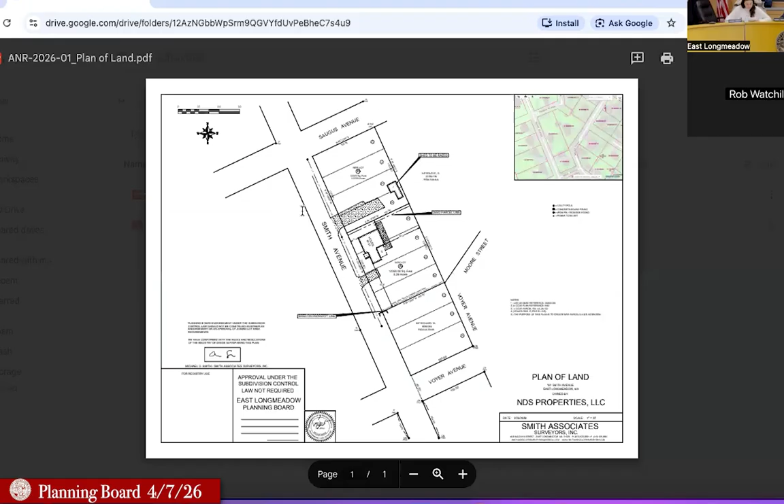Approval not required, ANR 2026-01, request to create 2 new parcels at 101 Smith Avenue, Assessor's parcel ID 4A2910-102, located in the Residency Zoning District, applicant Dawn Orbo, 69 Lenox Circle, East Longmeadow, Mass, 01028. Okay, anybody here for the petitioner?

No, Mr. Chair, but they asked me to speak on their behalf for them, if that's okay. Okay, so basically they're just taking an existing lot and splitting it into 3 separate lots along Smith Avenue.

So as you can see on the screen, I know it's a little hard, but you have one box here, a box in the middle, and a box up top. These 2 boxes on the ends each have a road that butts them. This one up here is Saugus Avenue, this one down here is a road called Voyer Avenue, and Smith is along the side here.

Just from my initial review, all of them meet the regulations for the zoning districts they're located in, in terms of frontage and lot size. I don't anticipate or see any issues splitting the 3 properties as they are.

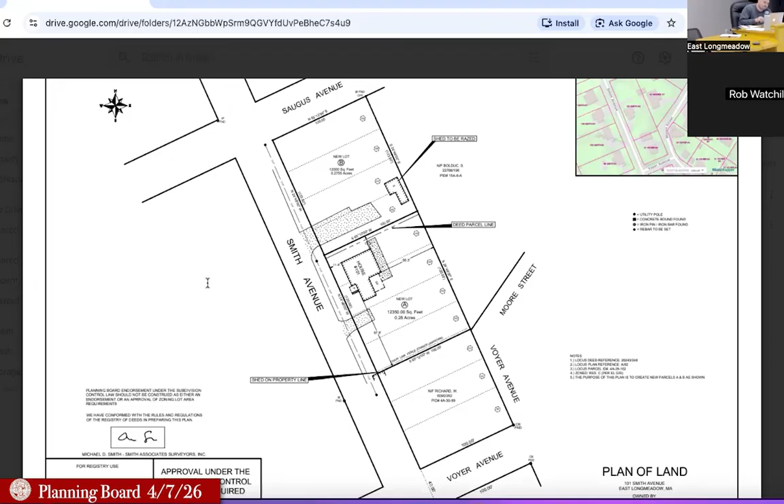Any questions, concerns? Do I have a motion to endorse the plan? So moved. Do I have a second? Second. Ooh, I was turning it off and I hit the emergency button. Okay, any discussion? Hearing none, all in favor, say aye. Aye.

I make a motion to move case site 2026-02 to next in the agenda. I'll second. Motion made and seconded, any discussion? Hearing none, all in favor say aye. Aye. Would you please read the item?

Case site 2026-02, request for a site plan waiver to construct a 7,606 square foot addition to an existing manufacturing building, with requested waivers at 302 Benton Drive, Assessor's parcel ID 10-9-2, located in the Industrial Garden Park Zoning District, applicant WF Young, Inc., 302 Benton Drive, East Longmeadow, Mass, 01028.

Hi, good evening. Good time, okay, yeah, before it starts. Also have a rendering of the proposed addition that's on its way in, so.

So I'm going to open the public hearing. All in favor, say aye. Aye, aye. Keep it in there.

What? That's a later item. Mr. Chair, can I pass out the supplemental? Certainly, I believe I already gave this to the applicant. It's just a comment from our Public Works Department regarding stormwater. Excellent, so I'll hand that out right now.

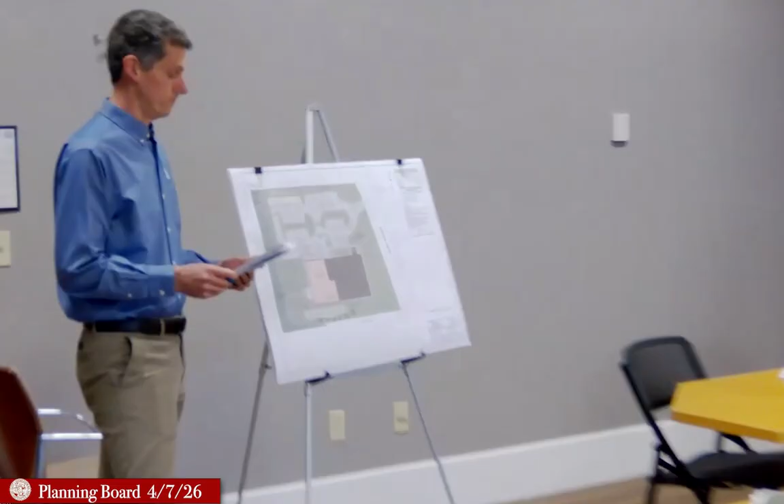For the record, my name is Kevin Grindle, project manager with Barton & Loguidice, the firm representing the applicant this evening, WF Young, with the site plan application for 302 Benton Drive, their facility currently at this address. So for you this evening is a 7,600 square foot building addition.

To the plan left, or the west, shown in an unfortunate color of pink from our plotter this afternoon, you see the building addition to the left and the existing building addition in more of a brown color, the existing building in the brown color in the center of the plan. The existing building is a little over 13,000 square feet, it's 13,250 square feet.

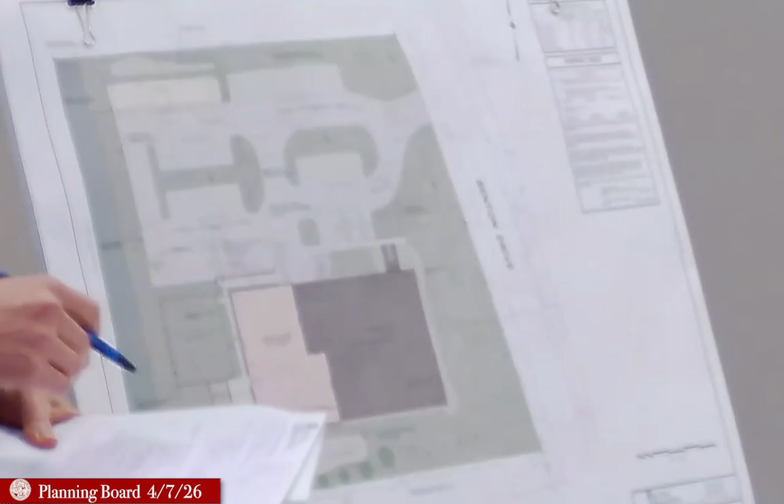What we're looking to do is put a 7,600 square foot building addition off the back of the existing building. The primary use of that space is for additional office space and storage, warehousing space that goes along with their existing uses. They've experienced an excellent growth model here at their existing facility and are really just responding accordingly, looking to put this addition on the back of the site.

On this plan, you see the existing building, and the gray color is the existing parking areas. This grass area to the west is really the most logical location for building expansion, obviously with the front yard and side yard setbacks as shown accordingly.

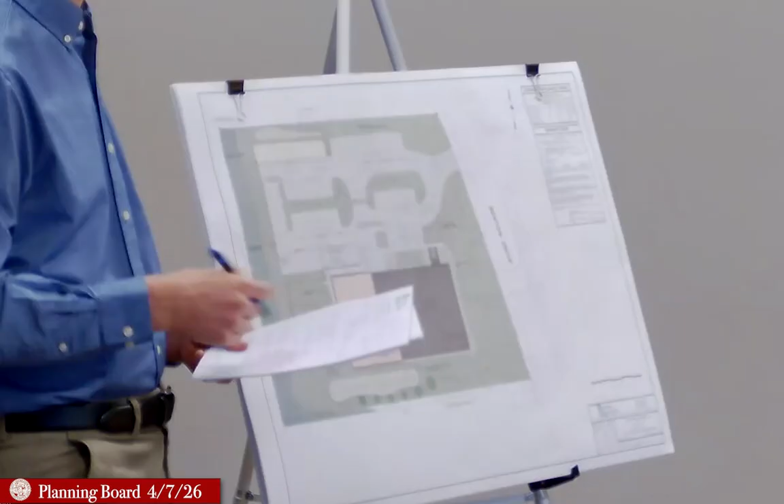So ancillary to that building addition, obviously there's conversation as far as green space, drainage, traffic, and parking—the typical conversation we'd be having with planning boards on an application such as this. What we're looking to do is utilize the existing parking as it stands, in this gray tone. On the top left, on the northwest side of the site, you see 13 parking spaces that we're identifying as proposed parking spaces at this time.

What we're looking to do is construct those parking spaces right now, and as I go through this narrative, there are also areas crosshatched in red that we're looking for a proposed waiver on, and that's a conversation we'd like to have with this board this evening.

The configuration we're proposing right now is a build-out for 70 parking spaces. We feel very comfortable saying that is far beyond what we need to account for this growth model and to handle this additional 7,600 square feet of building. But recognizing what the parking requirements are for the town, we've identified what it would take to propose the total 86 parking spaces that would be required based upon the building square footage per your regulation.

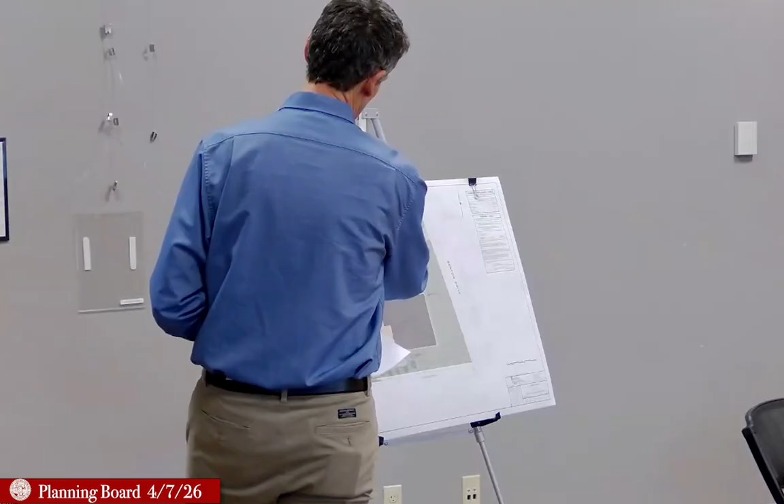So pivoting from the building and the parking, the next item of conversation would be drainage. Obviously there is an increase in impervious area based upon the 7,600 square feet of building and roughly 2,400 square feet of additional parking with this new parking in those 13 new spaces up at that top left. You'll see on this plan, bottom left—southwest and northwest—there are small detention basins being shown.

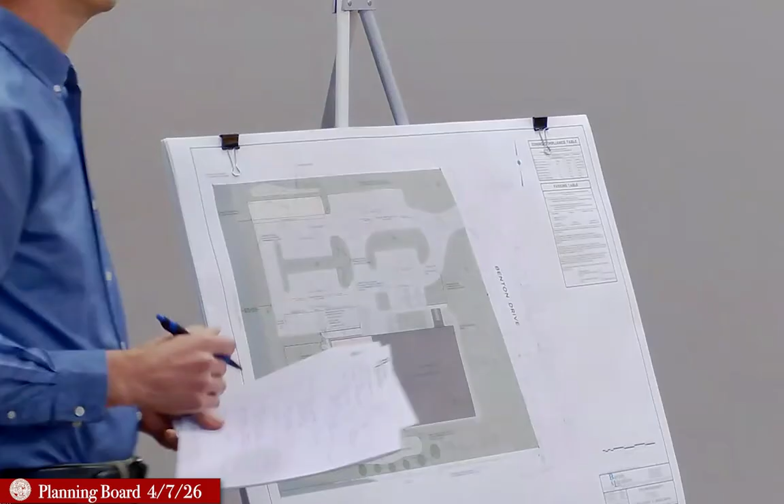Those basins are similar to what you would see along the frontage of WF Young's existing facility, and also similar to the configuration of the basins that when I was last in front of this commission, we were looking at the facility just north of us, the new CHD facility. We utilize a similar detention basin configuration on this site to the north as well, taking advantage of fantastic soils.

These soils are draining 4 feet an hour, well beyond most soils I'll see on a daily basis. So taking advantage of very good sands and gravels, fairly deep groundwater, what we're looking to do is construct a basin on the southwest side that would handle all of the roof water, both for attenuation of a 100-year storm, retention of that storm, as well as infiltration of that 100-year storm. Not very often can I say that we're in a position to be infiltrating a 100-year storm; typically we're retaining it and sending it off-site. So this basin on the southwest handles and infiltrates and attenuates the 100-year coming off the building.

This increase in parking area is handled by a much smaller detention basin, runoff basin, coming off that parking area along the property line, directed back into swales and then into the existing drainage pattern within the site. That's running along the existing basin and then being infiltrated through yard drains and a larger detention basin in the front. The expectation is that there's no water leaving this site, no water discharging off this site for a 100-year storm. Everything is infiltrating, keeping roof water to the southwest and the minor parking lot water within this basin that goes into the larger treatment train already existing on site.

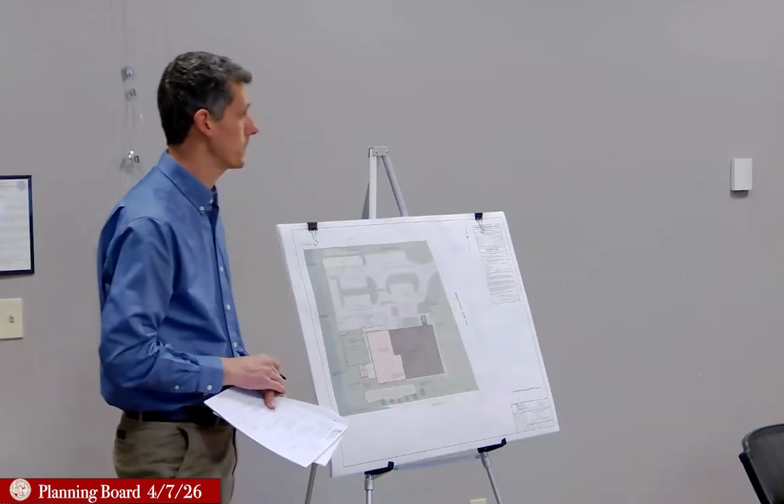You also see on this back, southwest corner, the large lawn area existing on site. Off the back of the existing building there is a wooden pavilion structure, a small outdoor gathering area that will be within the footprint of this proposed building. What we're looking to do is effectively shift that west, construct a similar pavilion structure off the back of the building, again taking advantage of a lawn area and privacy off of Benton Drive so that employees and visitors can take advantage of that lawn area and some outdoor opportunities within that pavilion structure outside their main office complex.

A couple other minor items, kind of a checklist through the regulations. Recognizing the wooded buffer to the west is existing, we're not looking to propose it. There is no substantive clearing as part of this application. Again, coming right off the back of the building, taking lawn area, but no tree clearing.

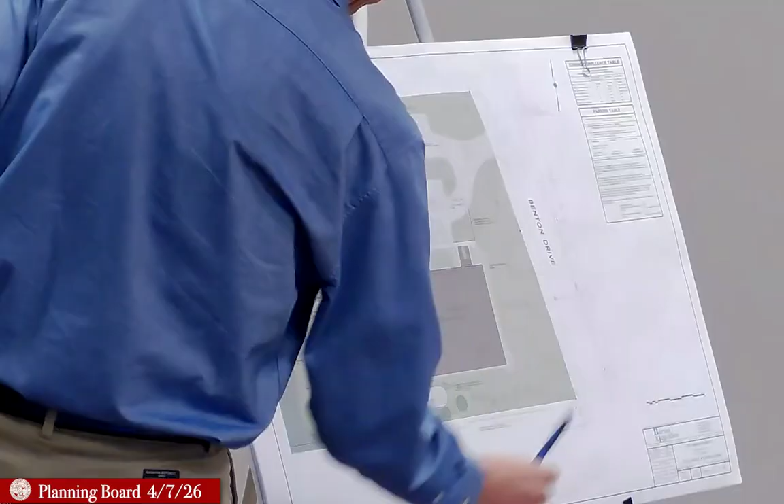We are proposing minor vegetation along the detention basin, continuing the theme of evergreen species along that southern border, continuing that up along the detention basin to provide some screening opportunities from the basin, and again just aesthetic appeal based upon the building configuration.

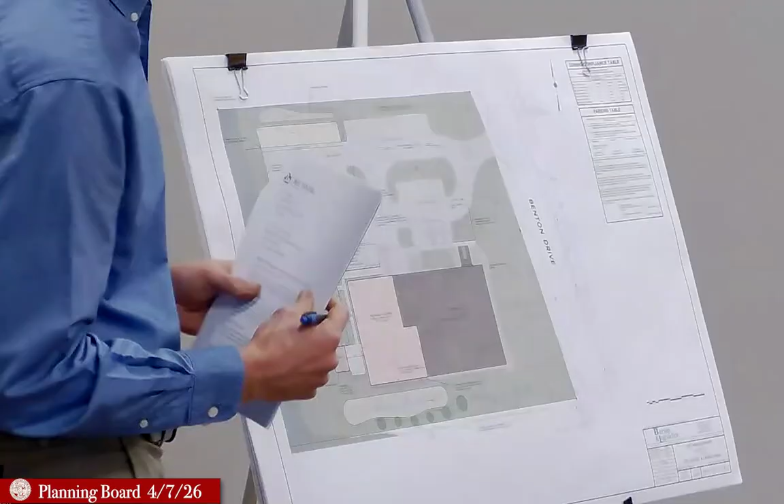The parking is, as our narrative did indicate, there is an additional handicap space coming into the back of the building that we're proposing to access with a new sidewalk and pathway network to what will be a new entrance on the backside of the addition. But aside from that, pedestrian traffic and flow on the site does not change. Effectively we're just moving a sidewalk back, as well as providing egress coming and going out of the building addition.

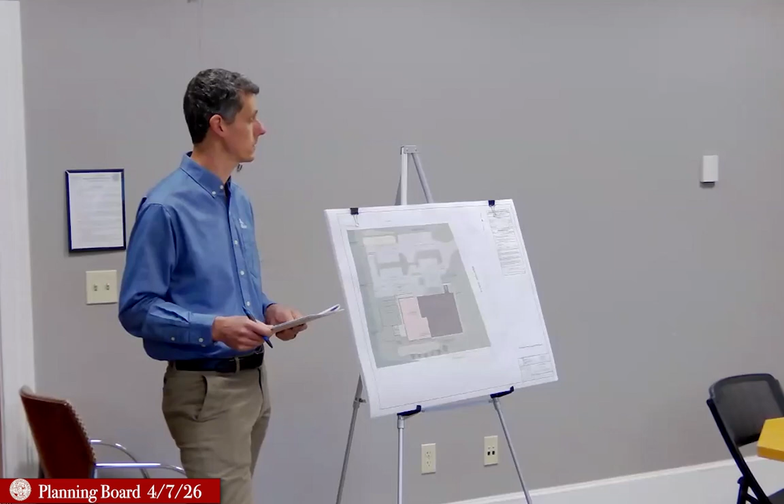So with that, I will keep myself brief here. Team from Associated Builders, team from WF Young, and team from Architectural EL is with me this evening. So with any hard-hitting questions, I can pivot back to the experts that will have the answers for you. But I hope I've gone through the narrative and submission and town requirements well for you. Again, here with any questions. Thank you all very much.

Of course, thank you for complimenting us, thinking that we ask hard-hitting questions.

Questions before I ask anyone else if they wish to address us? Well, you know how I feel about waivers of parking area.

Yeah, I do. All right, anyone, this is a public hearing. Anyone else wish to be heard on this matter? I'll ask one more time. Is anyone? Yes, sir? Ralph Page, 137 Pease Road, former planning board chairman, currently town council member.

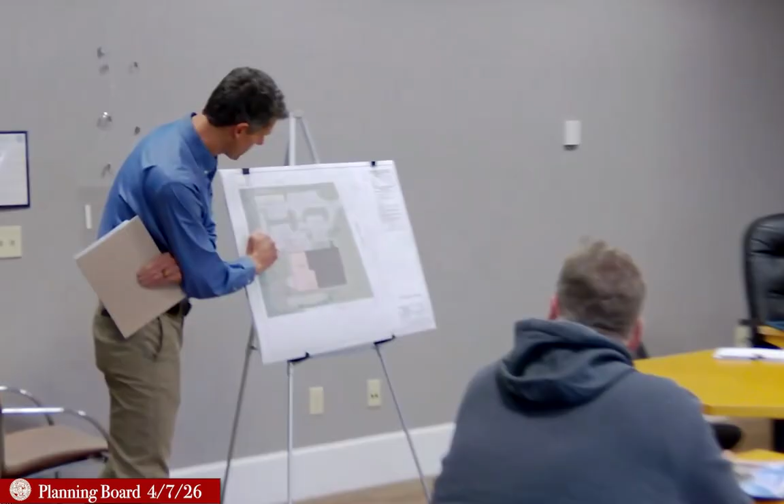Just a couple things that are hard to see from the picture: the dumpster for trash removal. Whereabouts is it located and is it fenced in? The existing dumpster is in the southwest corner of the site. It is fenced in and it will not be moved or altered based upon this application. Are you thinking that it's sufficient to handle the increased size of the building?

Absolutely, okay. It only handles typical office waste. There is no expectation that it would need to be increased at this time.

So just for full disclosure, I'm very familiar with the property. We used to maintain the condominium office condos right next door. I think the addition and all will work perfectly there.

I do like the thought, and I believe Marilyn could correct me. I think when they originally came in years ago, they asked for the same type of deal with the parking, that they weren't going to need all the spaces, so they left it as grass, but it's dedicated in case in the future they have to. And I think that's the big thing here, is that they have the space for it. If you leave it as green space, it's probably better than putting asphalt that's never used. So I would definitely be all for that.

I think the layout and all looks great. Thank you. Do you want, yeah, I better sign in.

So I put that in your packet as a possible condition to consider. And just when we get to that part, Russell, all the conditions for the permit are now in here, more transparent, makes more sense to go through all of them. But yeah, I have a proposed condition the board should consider, conditioning the parking situation. So if there were reserved spots, if the board wants to go down that route, it's wise to make that condition of the permit, just in case.

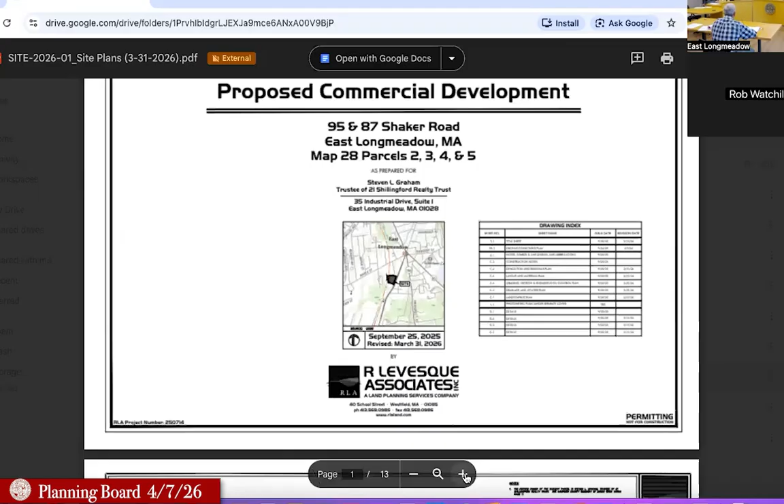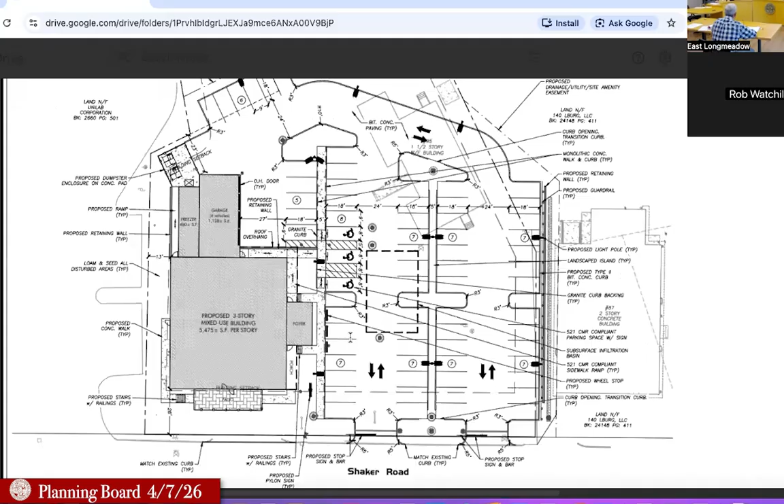The reason for doing that is there are a couple things that changed. One is the stormwater catch basins now have all been put underground. The primary reason for doing that is we've increased the parking substantially -- from, I think, 53 spaces originally, we're now up to 72 spaces.

And moving it to the south puts the parking, rather than on each side of the building -- parking is now to the north of the building, between the Chapter Lane Kitchens building and the new building proposed. Okay.

We have a third more parking, and we've got the stormwater buried, which should make it a nicer lot and should be nicer to look at. And we have the third story, which, as the zoning requires now, is commercial.

If there's a mixed-use bylaw that comes into place, then we have plans to turn it into 4 to 6 condominiums, in which case the parking requirement would drop substantially. Parking requirement for the commercial space is 75 spaces, if it's 5 spaces per 1,000 square feet -- I think the zoning requires either 4.5 or 5. So at 4.5 we're above it; if it's 5, we're slightly below it.

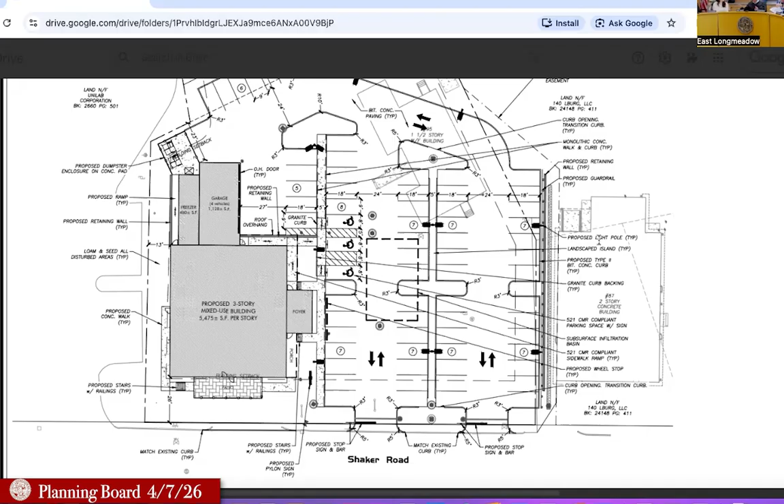Because, as we'll talk later in our meeting, we're just going to start the process here at the planning board, because there were materials referred to us by the town council this past week or the week before, on a draft bylaw for the town center. I met with Rob last week, and we'd like to lay out a timeline for how we go about determining what we want it to look like, what the boundaries look like, what type of housing would be allowed, the densities, the setbacks, the whole bit. When we get to that, you'll hear more of our conversation.

So essentially, the waiver for the parking would be for 3. Okay, Mr. Punderson? I can live with that. I think it's a great looking plan. Thank you. It is essential that people recognize where the in and out is.

The building across the street is kind of like a surprise when you try to pull in. I'd like to see signs that say one way, do not enter, instead of just a line painted on the pavement, so it's not a surprise. The office building - yeah, your office sits in that building. Irina's is there, and the hair place - oh, that's next door. Yours is one way in, and one way out. It's kind of a surprise that the signage isn't really good.

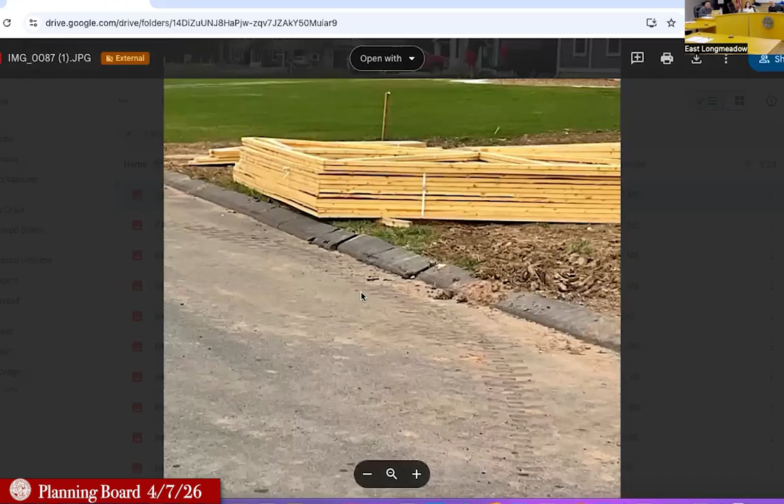If you don't mind, Mr. Chair, I'm actually going to go through a few of these, just to show for the record. As you can see here, there's significant damage to this curbing. I know they're probably having large vehicles come and go, but maintenance is not in the greatest order. Some of these pictures are just bad.

So do they have a certain period of time to have a completed project? No, because once they started doing any work, they're within compliance. We don't have a deadline to complete the whole thing either, at least in the conditions of the subdivision. We certainly have not accepted the streets.

You have it in such bad condition. Yeah, they still have a performance guarantee for the site. Like the covenant's been released, so they're starting to build left and right. They just have to extend the deadline for the performance bond, or else they can't really do much else building.

How much is the performance bond? I don't remember the exact amount, but it's sufficient. DPW recommended the number based on how much maintenance and construction was still needed, including laying down the top coat and probably recurbing and some sidewalk work.

But even their catch basins on the property are overgrown. They're not in the best working condition, which is also under your purview, because you have to make sure the detention areas aren't overgrown so they can appropriately drain water into the water table.

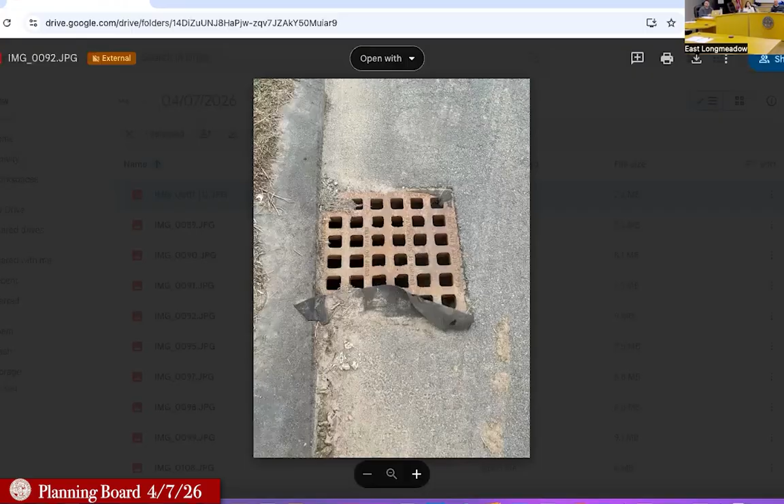So this is a storm drain right here. You can see there's evidence of silt going into it, but there's another photo of one that looks way worse, this one right here.

It's clear that all of that is just gravel and debris, and there's even a wood block here. I'm assuming that didn't come from the tree itself, so it must have come from somewhere else, more man-made.

But yeah, I think the conditions are appalling. I think myself and the folks who went on the site visit all agree that further action is definitely going to be warranted here. So I think it's time.

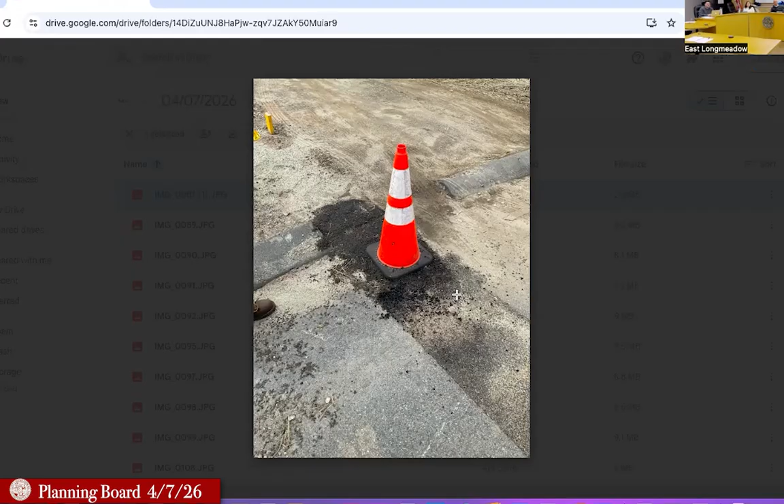I think you as the board, in order to do anything moving forward, you have to authorize... oh, look at this one too. They did a cold patch of that damaged part of the road, and it's looking pretty bad, already crumbling. And that's problematic.

So you as the board would have to authorize me to write another letter on your behalf that I would then send to them. I'm gonna do first-class certified mail to the owner of the subdivision, just so there's proof that it was delivered to somebody. I'm gonna copy in their attorney, Josh Levine, who I still know very well, and then the realtor, who I believe is Carpilla. Everybody's gonna be roped into this. There's gonna be evidence, documentation, just so nothing is left under the radar. There's no, oh, you didn't actually send it to us. Yes, we did, here's the proof.

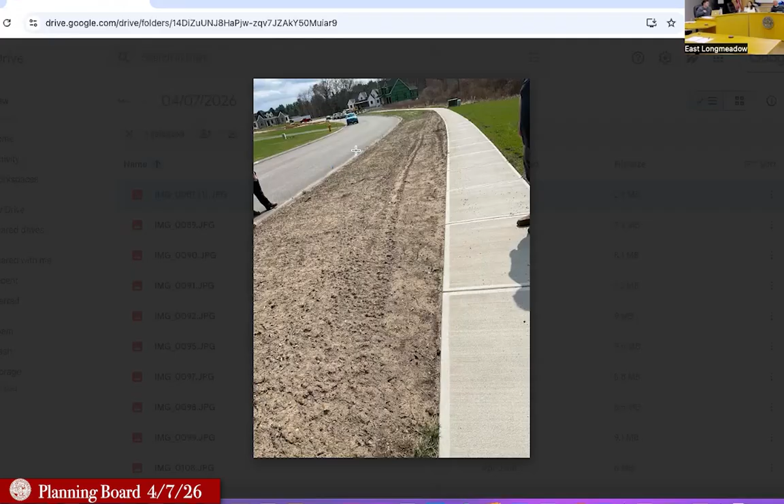I think we should look at and address all these different issues, just so they can at least do something. And it's up to you how long you want to give them from date of receipt of the letter. If you want to do 30 days, your choice. It's been going on long enough, so 30 days from the date that they receive it, I think is fair, because it does take time for them to get there. We'll have proof of that, because once we get the slip returned to us, it's gonna show the date they received in the mail.

So that's pretty much it, Mr. Chair. I don't know if you guys have any questions for me, or if you're pretty set on that. Pretty cut and dry. So the end responsibility will be on the owner.

Yes, the owner of the subdivision. The owner will have to have some sort of contact with the various builders that are there, and put some sort of pressure on them to adhere to keeping the property clean, neat, fix it, not breaking curbs, not letting debris be in the street or washed away from their property. The road is their property. I know, yeah, but what I'm saying is the contractors have to abide by certain rules.

And maybe there's not enough silt fences, whatever. If they got water in there and they can't work, well, then they can't work, but they can't take the silt fence down and let the stuff go in the storm drain, or poke holes into it. Yeah, and they've actually cut the material in the storm drain?

That's what the building commissioner says, and he says that he's gonna reach out to those properties individually and say, fix your stormwater mitigation, your erosion controls, fix all that stuff. And I think Felix is also gonna reach out to each of them about clogging up the storm drain. And Alex from Conservation even said some of the stuff is draining into the resource areas for wetlands, and then their detention basins falls under Concom as well, so he's gonna have the commission reach out to them too.